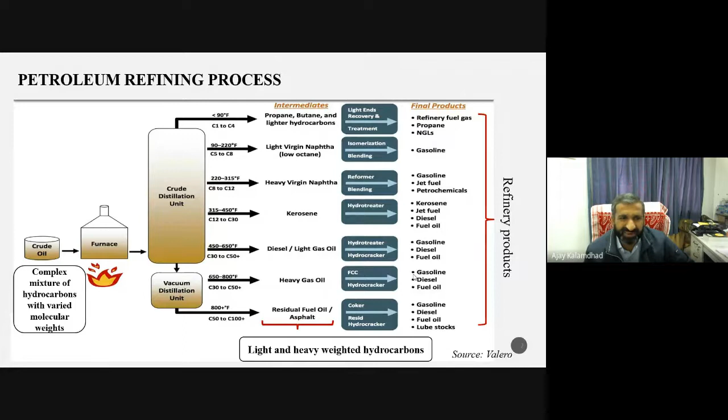Everyone knows about refining processes: hydrocarbons are processed into intermediate products, and these are the final refined products generated from refinery processes, like refinery fuel gas, diesel, and many other products. There are a number of refinery industries in India, especially along the Arabian Sea, and Assam is also known for these kinds of refineries.

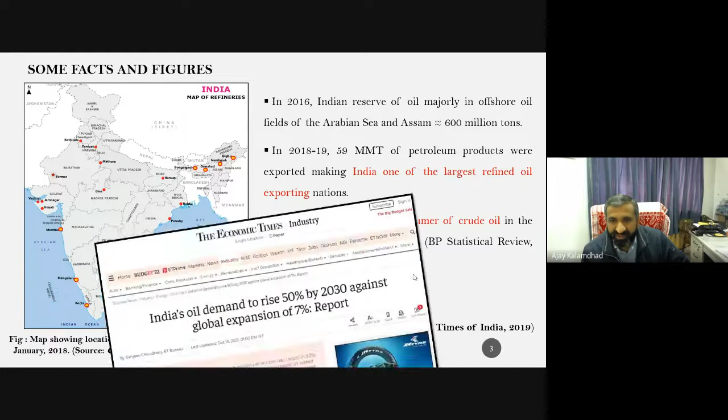Oil reserves are around 600 million tons as per the 2016 data, and 59 megatons of petroleum products were exported, making India one of the largest refined oil exporting countries. India is, after the USA and China, the largest consumer of crude oil in the world. This news also became very popular: India's oil demand will rise by 50% by 2030 against a global expansion of only 7%. I don't know whether we are all ready to manage this kind of demand.

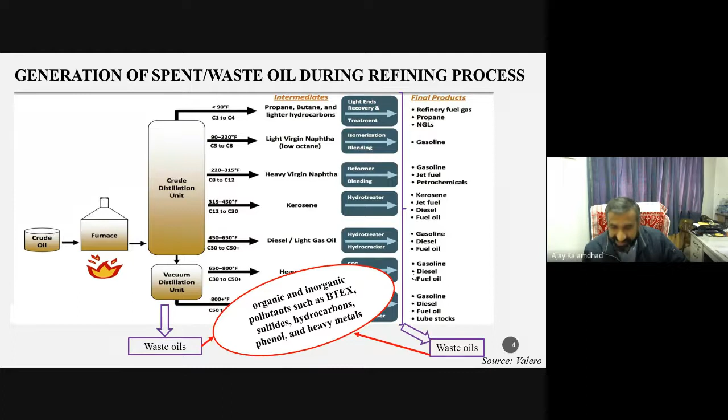Along with this, the processes generate a lot of wastewater, mostly what we call waste oil, whether from intermediate or final products. This waste oil mostly contains organic and inorganic pollutants, very polluting hydrocarbons, even phenol, and degradation is very difficult, especially of phenol, hydrocarbons, BTEX, and heavy metals. A good amount of heavy metals is also generated along with this waste oil. One such study is available in the US.

They were mostly talking about toxic air pollutants coming from the refineries. The problem is that refineries release toxic air pollutants, which can cause cancer and many other issues. Like, 22,000 tons of hazardous air pollutants are getting generated. That is one of the reports given by the US EPA.

And these are toxic, because these are carcinogenic, hazardous metals. A lot of health issues are coming out from the air pollution. I don't think in India we have studies available on how much air pollution is coming from these refineries. Not only the release to air, but the waste oil, which I was talking about in the previous slide, is very difficult to treat, and we cannot easily dispose of it without any treatment.

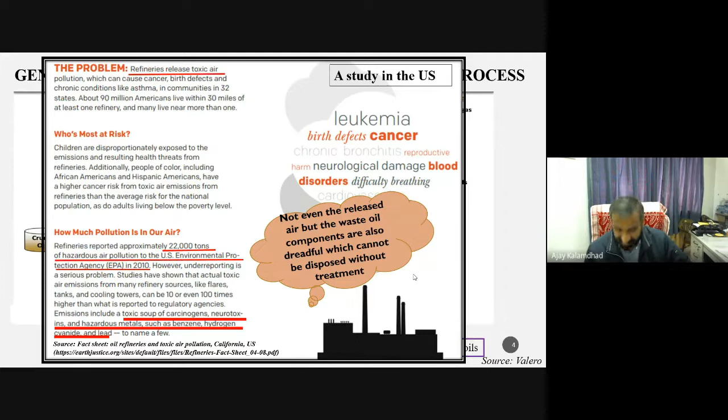But as per my information, all the refineries in India have treatment processes available. The effluent treatment processes, or whatever wastewater is generated, mostly waste oil, is treated by different methods. These are the major processes I showed, based on the different literature, by which it is getting treated.

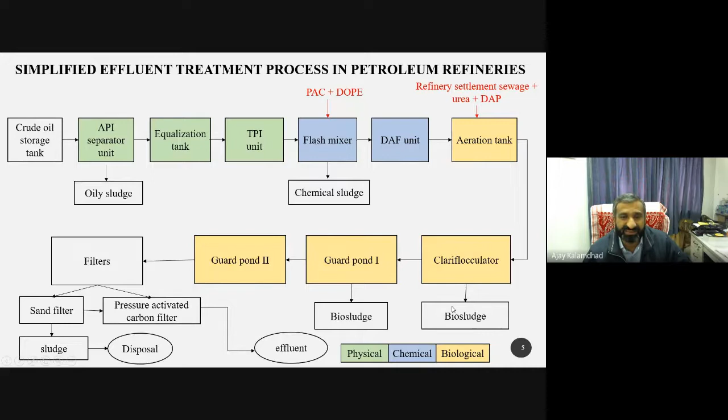And because of this wastewater treatment, a lot of sludges are generated: oil sludge, which is mostly physical in nature, and chemical sludge, especially from the flash mixer process. And the last point, the settling points, will generate a lot of biosludge, which is biological in nature. So all three different kinds of sludges are getting generated. I'll show you some photographs.

Here the oil sludge is generated from the physical treatment process. This is chemical sludge from the chemical treatment process, and finally biosludge from the biological or settling processes. And all these kinds of sludge are highly carcinogenic, highly hazardous in nature. And I don't know if in refineries some methods are available to treat that.

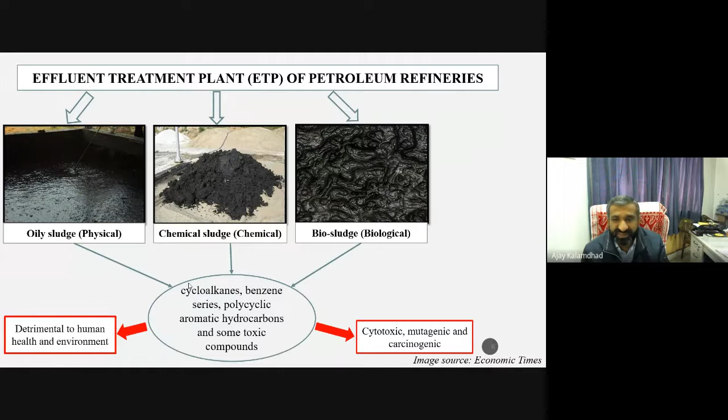Mostly in refineries you will find one pond where this kind of sludge is stored. But I never found any treatment process showing how they are treating it. This is very problematic and is creating a lot of issues, these sludges, and the generation itself is very high. I'll give some data. As I told, it is cytotoxic and carcinogenic in nature, not good for human health as well as for the environment.

Some facts you see here: 1 kg of crude oil will generate 10 to 20 grams of oil sludge, and more than 60 million tons of oil sludge is estimated to be produced every year. 60 million tons, and more than 1 billion tons of oil sludge has been accumulated worldwide. It's not only in India, but 1 billion tons of oil sludge has been generated.

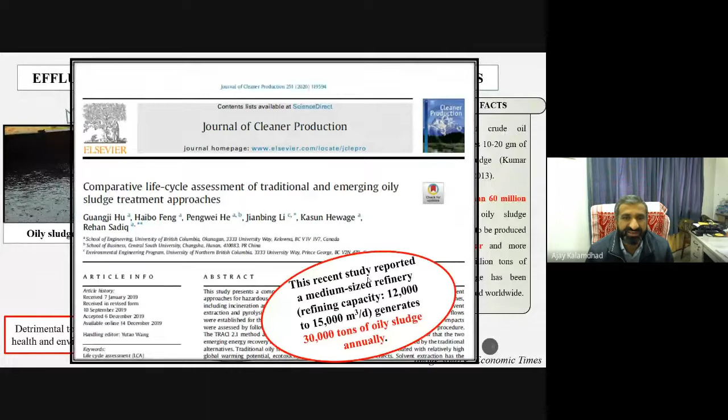So what kind of treatment and disposal of refinery sludge is normal? In India, I don't think we have treatment facilities available, but in European countries, they go for incineration. Incineration uses rotary kiln and fluidized bed; because it's light matter, it's good for incineration at a fluidized bed facility. Rotary kiln is also one of the very important technologies for the combustion of these kinds of sludges.

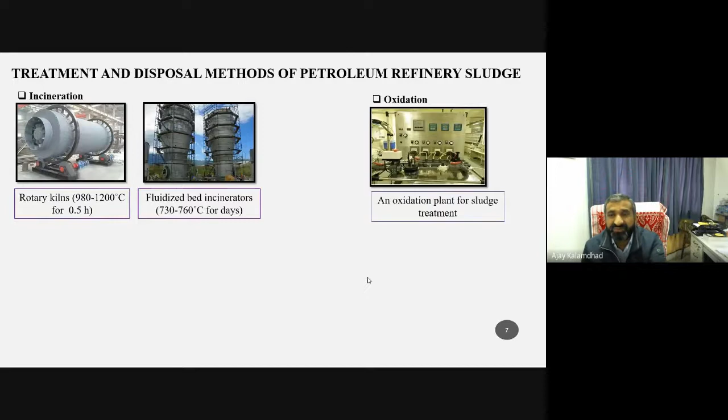Some countries have even started oxidation plants for sludge treatment, because a lot of organics are there, so oxidation of those is easily possible, especially for biosludge where the organic content is good.

And some countries like India are also doing sludge stabilization. A very simple method, or just land farming treatment. This also I think is very popular because it's a somewhat economical process.

But when you take the incineration facility, it becomes very expensive, and again after incineration, huge amounts of ashes are getting generated, that is solid residues. Even during combustion at 900 or 1000 degree temperature, it generates a lot of flue gases. That also we have to treat before putting to the atmosphere. So it's a very expensive method.

And in oxidation, we require a lot of chemicals in the oxidation process. But again, a lot of wastewater will get generated in the oxidation process. That also requires another treatment facility. And sludge stabilization and land farming obviously require a lot of land.

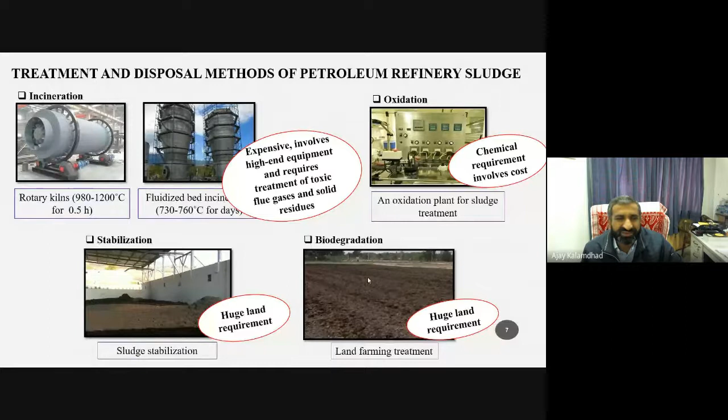In earlier days, refineries used to be outside of the city, but nowadays, I think you visit any refinery, it's very close to the city. Finding this kind of space or land every time is very difficult. Take the example of Guwahati refinery. Whatever space is available inside their campus, I don't think they can work with this kind of management for more than 2 or 3 years. So this is what one of the reports says.

So we already need an alternate source of energy. So not only are we required to manage the waste.

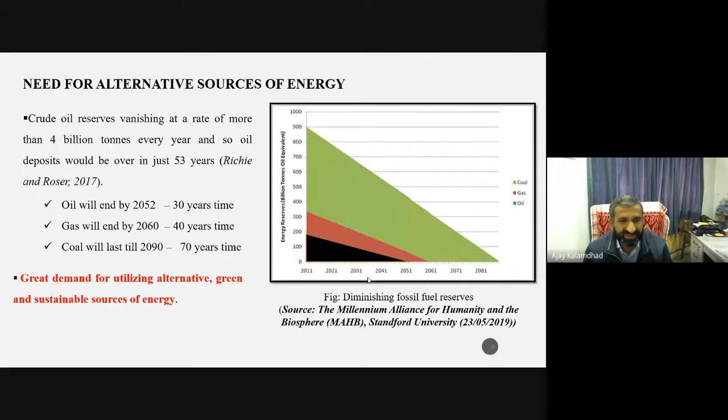So if you see the characterization of this refinery sludge, we call it PRS, it can be a potential resource for biogas generation. We found that the calorific value of different types of PRS, whether from a physical process, a chemical process, or a biosludge process, is very good. It could be 17,000 to 19,000 kilojoules per kg.

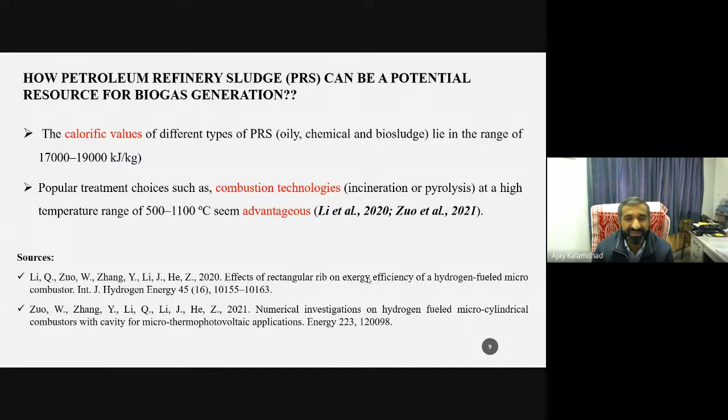And popular treatment choices, combustion technology, incineration, pyrolysis, are advantageous. There are some studies done in China. China is trying; you can see there are 2 research papers I found. They propose that because of the huge calorific value, combustion will be more beneficial or advantageous.

But the characteristics of PRS vary greatly in moisture content. The moisture content sometimes will be very low, like 6%, and many times it is found to be up to 80%. And if you go for combustion or incineration of such sludge, I don't think it becomes economical, because we require a lot of energy to first remove the moisture, and only then can the combustion go ahead.

So if you see, PRS could be a potential substrate, because it already has a good amount of organic matter, and also the moisture content is there. So why not propose this kind of material for biogas production? Okay.

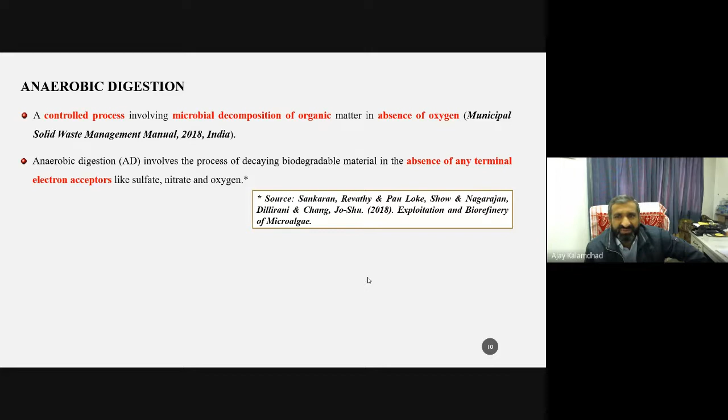So first, I'll talk on anaerobic digestion. What is anaerobic digestion? And then I'll show some of the literature and our work, how beneficial anaerobic digestion of these kinds of sludges could be. Normally, anaerobic digestion is a controlled process involving microbial decomposition of organic matter in the absence of oxygen. Or in a more technical way, anaerobic digestion is the absence of any terminal electron acceptor, mostly oxygen. Okay.

This anaerobic digestion process generates two major gases: methane and carbon dioxide. These are the primary components, along with some trace gases like hydrogen sulfide, nitrogen, and hydrogen, but the major concentration will be methane and carbon dioxide.

Whatever material is left after the anaerobic digestion process is called digestate, and it is normally very rich in nutrients. In India, the outlet of the anaerobic digester is often considered compost, but it's not proper compost. At many locations where these plants are installed, the digestate is separated into solid and liquid: the solid is considered or proposed as compost, while the liquid is recycled back into the anaerobic digestion process.

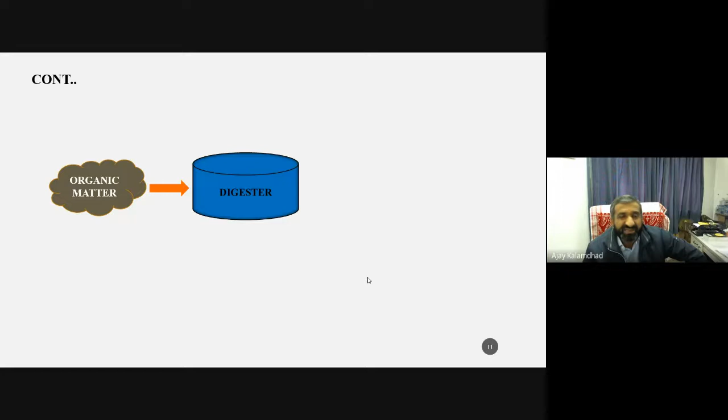To explain simply: organic matter, whether refinery sludge or any other kind, is fed into the anaerobic digester, and the outlet gets digestate while the digester generates biogas. This biogas can be directly heated for cooking purposes, or considered for biomethanation where biomethane is added into the gas grid. India doesn't have such facilities yet, but this is a popular method elsewhere. We can also use it as bio-CNG fuel, and nowadays everyone is talking about CNG-based vehicles.

This could be possible in Northeast India also. Just a few days before, our CM proposed that some vehicles will travel by CNG, and we can also generate electricity directly from this, power also can be generated out of that.

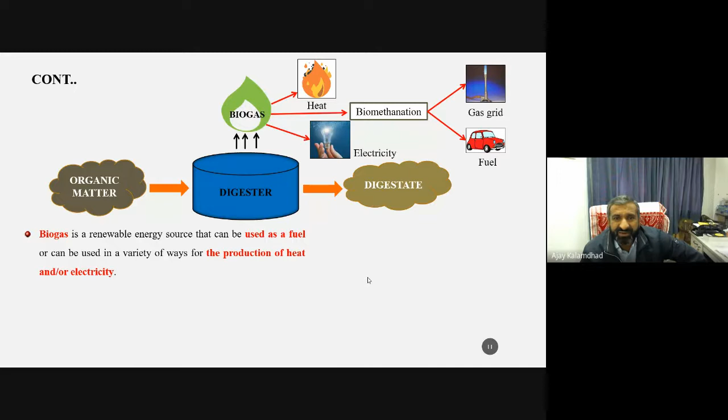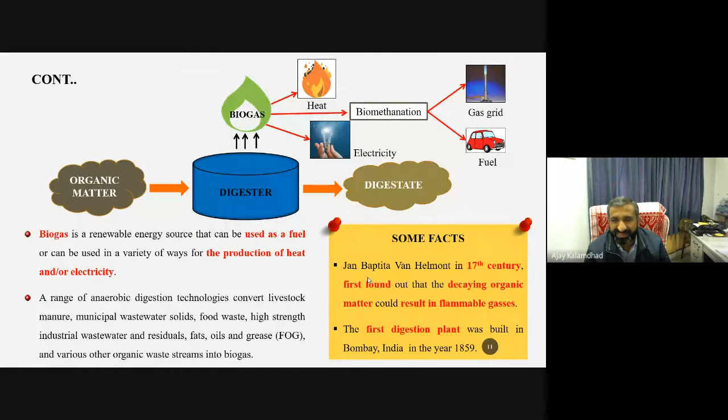To share with you, the first person was Jan Baptista Van Helmont, who found in the 17th century that decaying organic matter could result in flammable gases. But don't get surprised that the first digestion plant was built in Bombay, now Mumbai, India, in the year 1859. That is the first digestion plant.

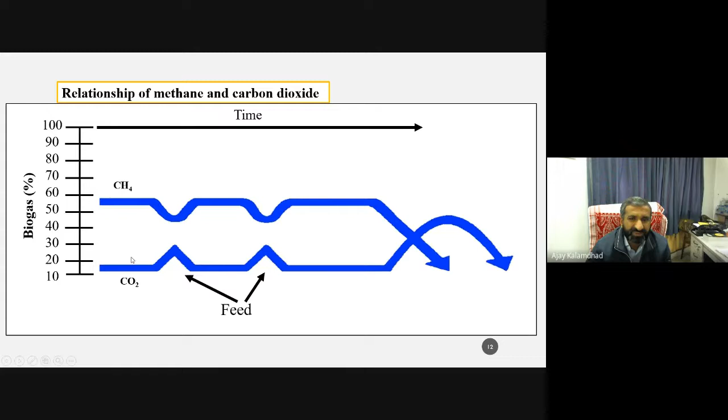So this is the reactor, and this graph shows biogas production over time. The methane will always be high compared to CO2, but over time, if the carbon dioxide production in the digester increases and the methane percentage gets reduced, there won't be any burning.

That means the gas is not able to be utilized for any method, whether for CNG process, gas grid system, heating purpose, or power production - it's not possible at all. So remember, if the biogas being generated has a carbon dioxide percentage more than 44%, it won't be a combustible gas. We can't even use it for cooking.

So what are the different stages in the anaerobic digestion process? It has 4 different stages: the first is the hydrolysis phase, then acidogenesis phase, acetogenesis phase, and finally methanogenesis phase. All microorganisms are involved at each stage.

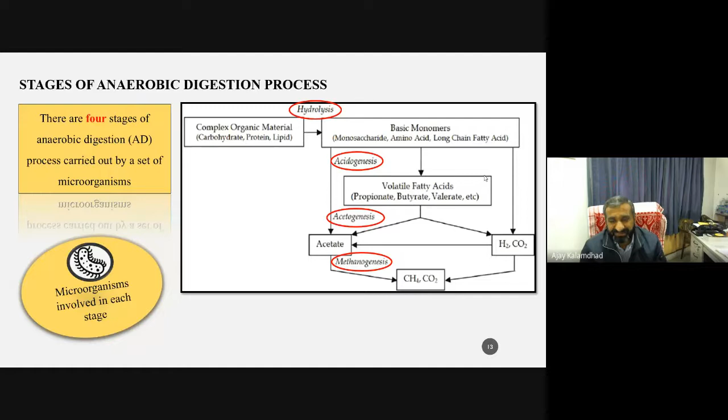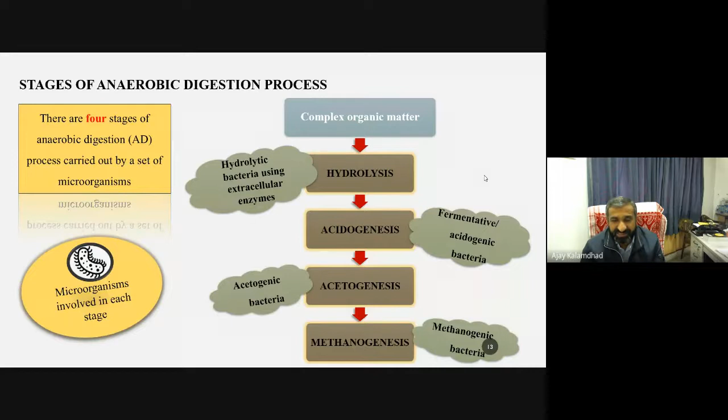This complex organic matter is first hydrolyzed by hydrolytic bacteria, followed by acidogenesis by fermentative or acidogenic bacteria, followed by final acetic acid production by acetogenic bacteria. This acetic acid is then broken down by methanogenic bacteria, and finally in this stage the methanogenesis process generates methane and carbon dioxide.

The role of microbes in the anaerobic digestion process is very important, mostly played by the methanogenesis process. But initially we require acetogenic bacteria, which will degrade the matter and convert it into acetic acid.

One by one stage: hydrolysis is where insoluble complex organic hydrocarbons are converted into soluble monomers. For example, cooking at home is like a hydrolysis process, where cellulose is converted into sugar form. Similarly, hydrolysis is required here.

Hydrolysis is a very slow process and very important - it is the rate-limiting stage among all four stages. We have to work more on the hydrolysis of the particular organic matter, and this involves microbiochemical reactions.

The second stage is acidogenesis, where hydrolyzed products are converted into simple molecules with low molecular weight, mostly generating propionic acid and butyric acid.

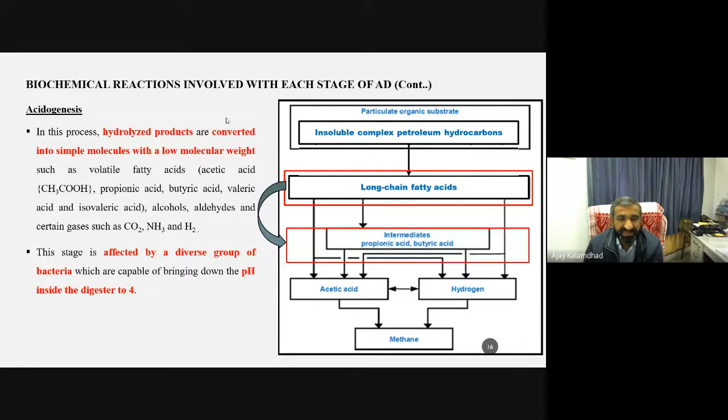These are called intermediates. It is affected by a diverse group of bacteria, which is capable of bringing down the pH inside the digester to 4. Only in acidic pH will it work.

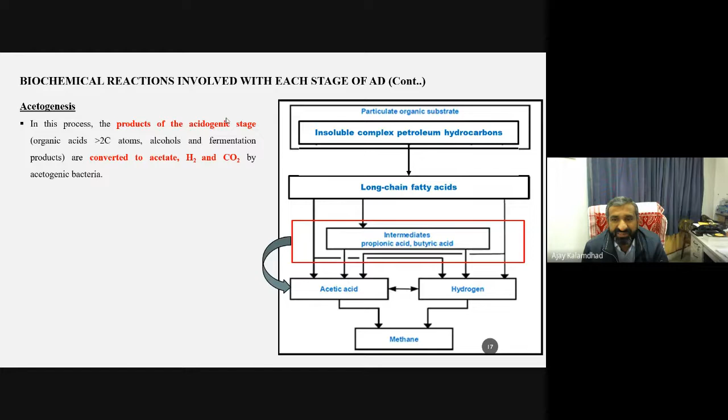The third stage is acetogenesis, where the products of the acidogenic stage are converted into acetate, H2 and CO2. These intermediates finally convert into acetic acid and hydrogen.

There are two different types of bacteria. Acetogenic bacteria work as H2-forming bacteria, and homoacetogens catalyze acetic acid to CO2 and H2.

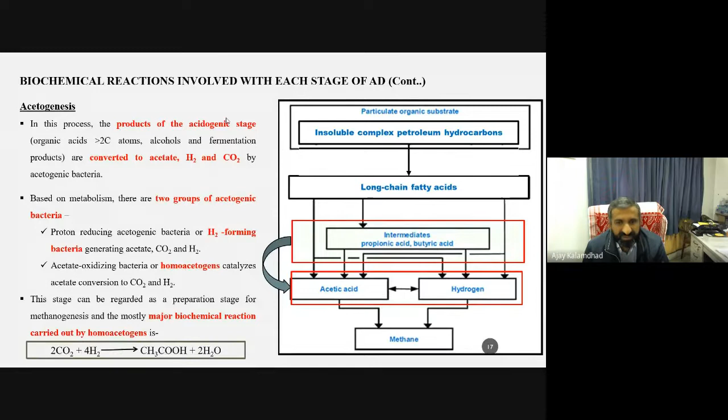Finally, from acetic acid, the last stage is methanogenesis, in which methanogens create methane from the final product of acetogenesis. There are two pathways: first, from acetic acid, CH3COOH converts into methane and carbon dioxide.

Also, a minor pathway is where carbon dioxide reacts with hydrogen. It's somewhat difficult to solubilize the carbon dioxide, but some amount is also generated by this method.

So what are the factors affecting the anaerobic digestion process? The first factor is temperature. This parameter plays a major role in the physical and chemical properties of the substrate and affects the thermodynamics and kinetics of reactions.

It's obvious that at mesophilic temperature, which is less than 45 degrees, most of our reactors or digesters operate at mesophilic temperature.

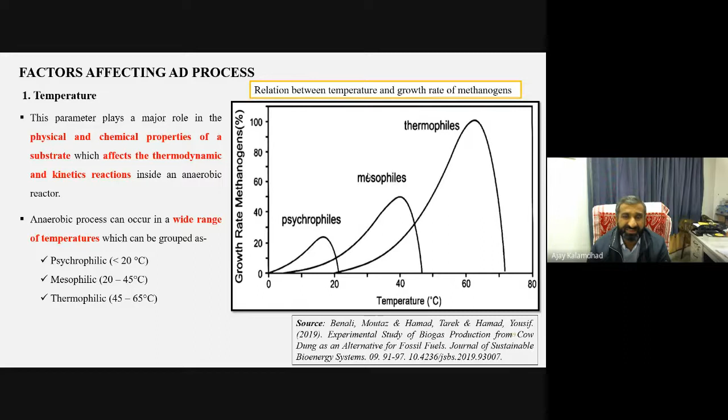At mesophilic temperature, the methanogenesis bacteria generation rate is very low compared to a thermophilic reactor. But the problem with a thermophilic reactor is that we have to provide a good amount of energy to achieve that kind of temperature, like 60 or 70 degrees in the digester.

The rate of reaction doubles for every 10-degree rise in temperature, up to an optimum, after which the reaction rate declines rapidly.

That's why in many places you see the digester placed underground, because it is highly affected by local or ambient temperature, especially in India, where in North India or other parts the ambient temperature can be close to zero, or 4 to 5 degrees. In that case, methane generation will obviously be affected.

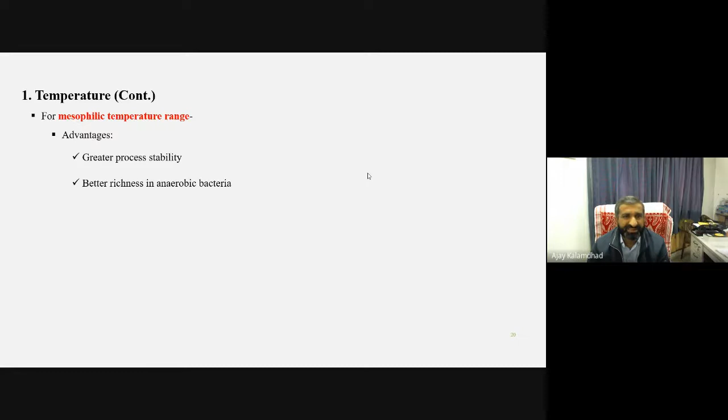But if you operate at mesophilic temperature, you'll get more stability and better richness in the anaerobic bacteria, only the yield will be lesser compared to thermophilic temperature. So too high a temperature is also not good, but mesophilic temperature is well accepted for biogas production.

Another parameter is pH. This parameter affects the overall efficiency of the digestion process, because in the acidogenesis process the pH will reduce, and only then will acetic acid get generated. But methanogenesis is only possible when the pH in the reactor is neutral.

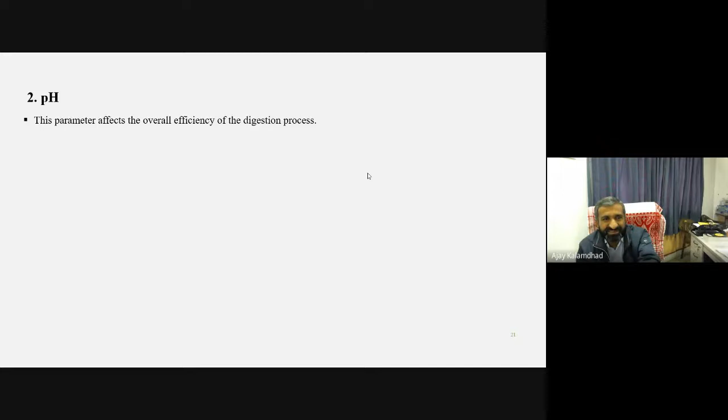Only at neutral pH will the methanogens be able to generate methane gas. That's why pH is a very important parameter. Normally, methanogens are effective at a neutral pH of 6.5 to 7.5.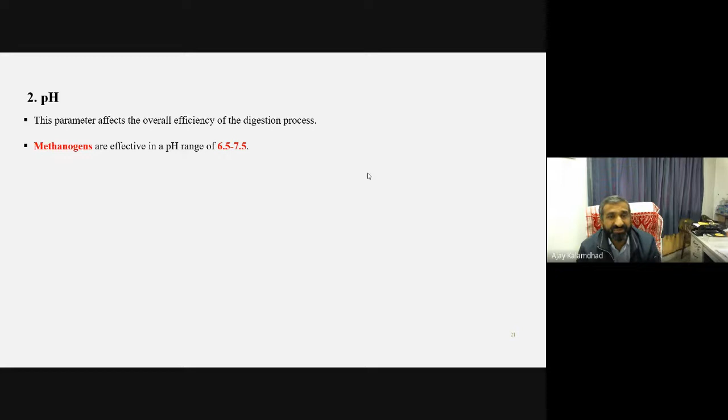To maintain a constant pH in the reactor, it is essential to control the relationship between volatile fatty acids and bicarbonate concentration. The volatile fatty acids reduce the pH, while the bicarbonate increases the pH, so this bicarbonate becomes a buffer in the digester.

As acidogenic bacteria flourish, lowering the pH below 5 will inhibit the growth of methanogens. Once the reactor pH is less than 5, it will inhibit methanogenic bacteria growth. And if pH is more than 8, it proves toxic to most anaerobes, inhibiting their biological function. pH becomes a very important factor for gas production.

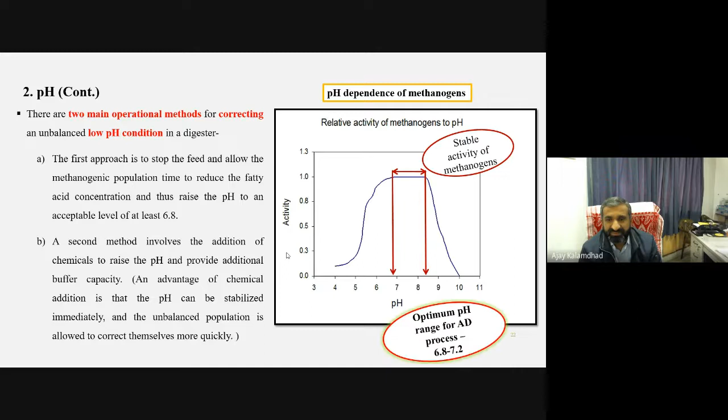This graph shows that maximum methanogenic or acidogenic bacterial activity occurs at neutral pH. This graph specifically shows methanogenic bacteria versus pH, with the optimum pH ranging from 6.8 to 7.2, up to 7.5.

Along with pH, we also need to discuss buffering capacity. In biological matter, a good amount of nitrogen is available, and because of the degradation of protein, ammonia is generated, which reacts with carbon dioxide to generate ammonium carbonate.

So this ammonia reacts with carbon dioxide and generates ammonium carbonate. This is one form of alkalinity in the reactor; degradation of salts also generates alkalinity, and sulfate reduction also generates alkalinity.

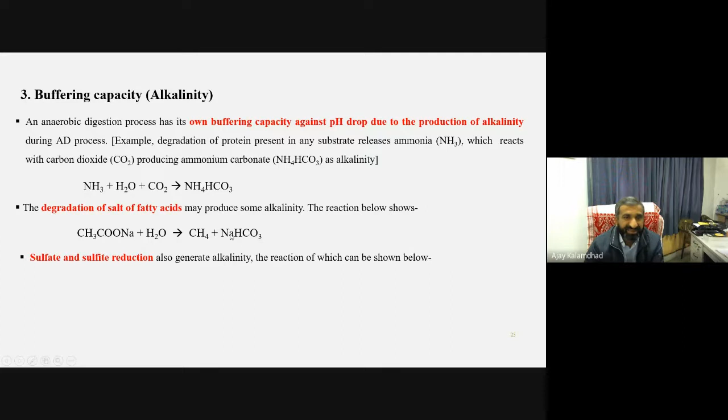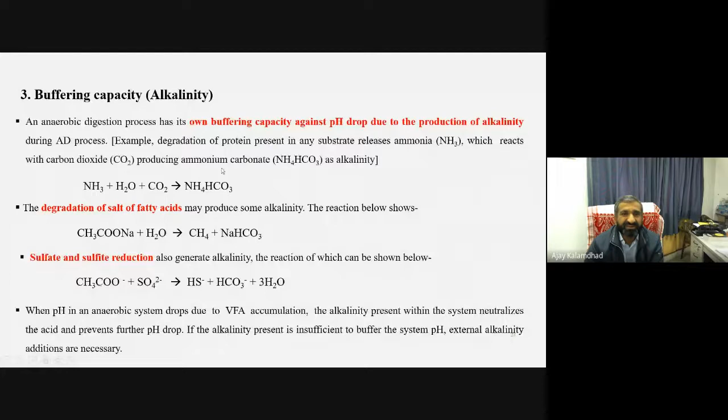Because of this, when pH in the anaerobic system drops due to VFA accumulation, the alkalinity present within the system neutralizes the acid and prevents further pH drop. That's why it is very important to see how much nitrogen content is present in the organic matter.

Another parameter is the carbon to nitrogen ratio. This is very important. If the nitrogen concentration is low, it will require longer duration for the degradation process, because the microbial consortia will be lower and won't be able to flourish. If nitrogen content is high, it will generate more ammonia. Ammonia is good for buffering capacity to maintain pH, but too much ammonia will inhibit the entire process.

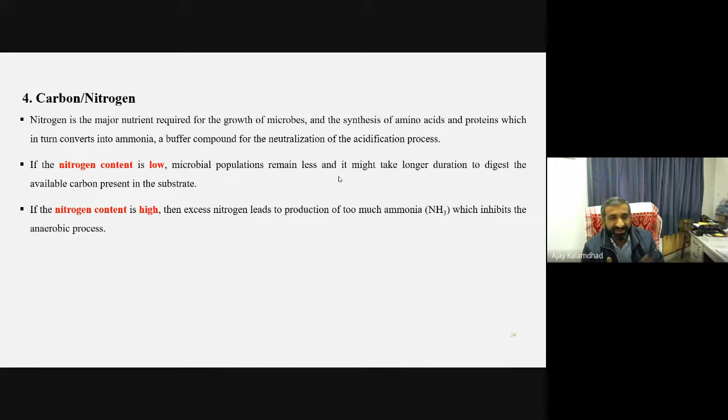Similarly, when feeding food waste into a digester, it often fails because if you don't treat it properly or combine it with the proper concentration of carbon, it's very difficult to run with food waste. Carbon serves as a source of energy and nitrogen controls the microbial population, so the carbon to nitrogen ratio plays an important role. A C:N ratio range of 20 to 35 has been found to be mostly suitable for various types of organic matter.

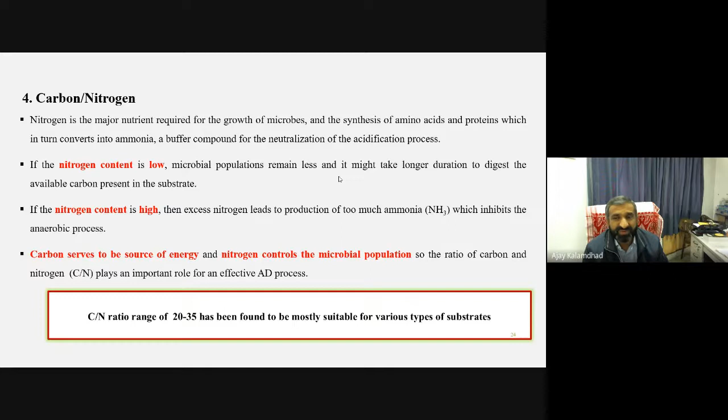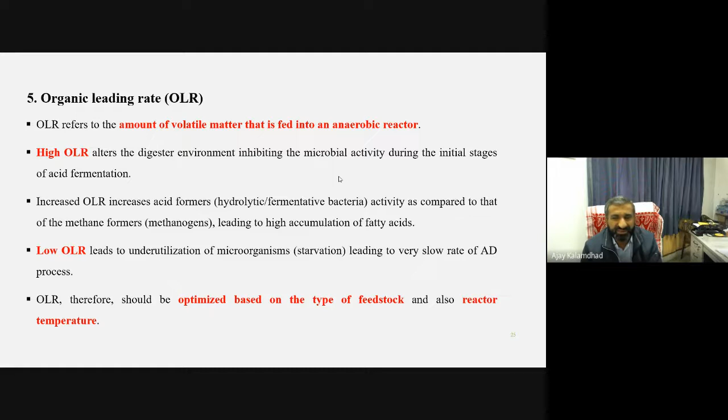Another parameter is OLR, organic loading rate. This is also very important. High OLR will alter the digester environment, inhibiting microbial activity during the initial stage, while low OLR leads to underutilization of microorganisms, causing a very slow rate of anaerobic digestion. So optimized OLR has to be finalized when we start feeding the reactor, and based on that we can propose the best OLR for any substrate or organic matter.

Another parameter is HRT, the average time that the organic substrate remains in the digester. Lower HRT is more beneficial, but it is desired to be long enough to provide sufficient methanogenic activity. HRT is shorter for AD at high temperature, but it also depends on the type of sludge or waste. Based on HRT, we finalize the digester size, how much quantity, and what kind of size will be required.

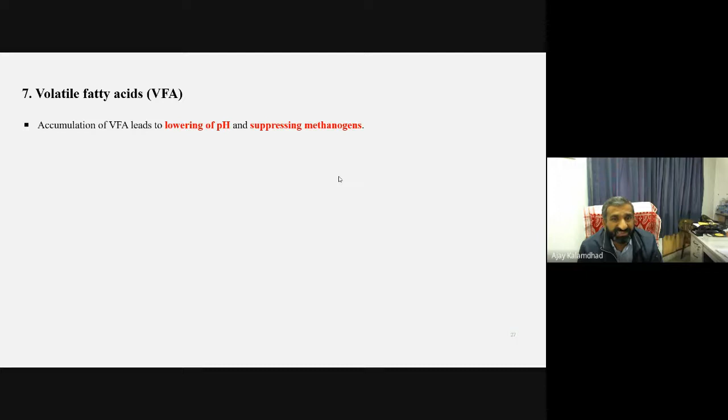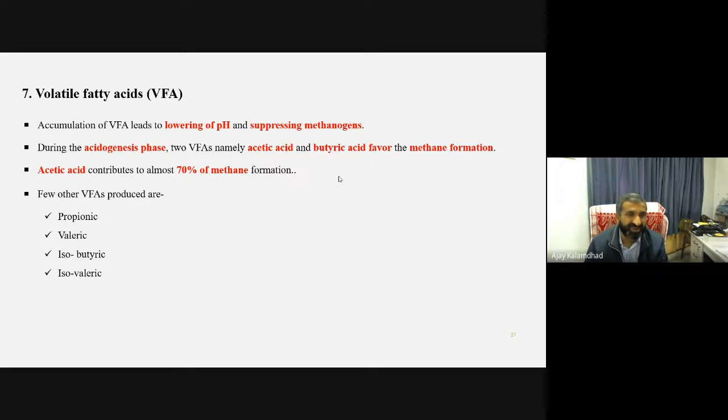Another parameter is volatile fatty acids. We look to generate more VFAs, especially acetic acid, which generates methane and carbon dioxide. But accumulation of VFA leads to lowering of pH and suppressing methanogens. In acidogenesis, acetic acid contributes almost 70% of methane formation, while remaining VFAs like propionic, valeric, or butyric acid contribute the remaining 30%. That's why VFA concentration is a good indicator for monitoring performance of the anaerobic digestion process.

There is another thought: biogas enhancement from any organic substrate through a pre-treatment process. We already saw that hydrolysis is the rate limiting stage, so why not propose the pre-treatment process at the hydrolysis stage itself?

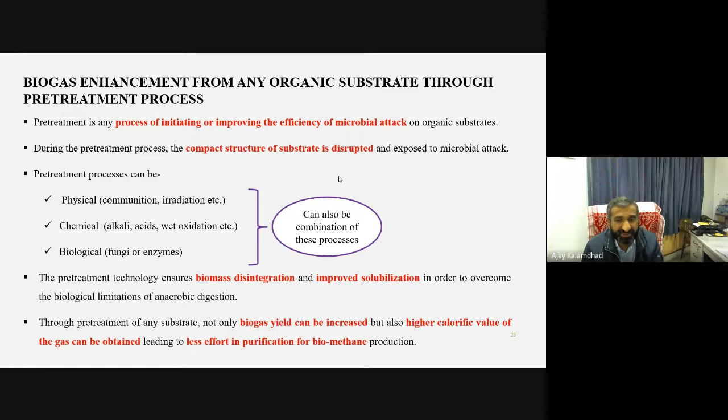Pre-treatment is any process of initiating or improving the efficiency of microbial attack. In the pre-treatment process, the compact structure of the substrate is disrupted and exposed to microbial attack. This can be done by physical, chemical, or biological processes, or different combinations. Through pre-treatment, not only can biogas yield be increased, but also higher calorific value of gas can be obtained, leading to less effort in purification for biomethane or bio-CNG production.

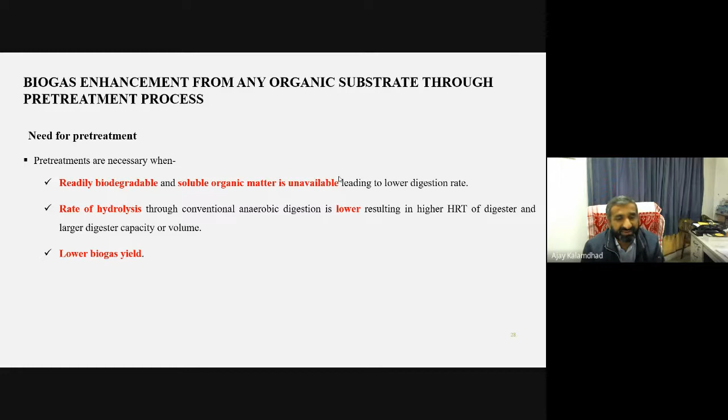What is the need for pre-treatment in biogas enhancement? When readily biodegradable and soluble organic matter is unavailable, we can propose pre-treatment. When the rate of hydrolysis through conventional anaerobic digestion is lower, we can follow pre-treatment. If there is lower biogas yield, we can also go for pre-treatment.

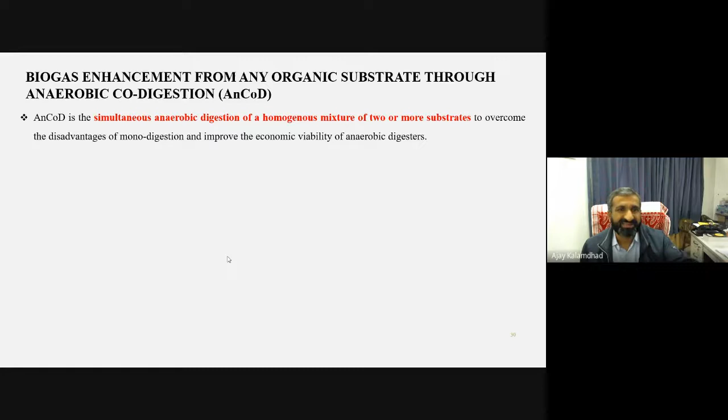There's another way we can do biogas enhancement, by the co-digestion process, anaerobic co-digestion. Normally we do anaerobic digestion for only one material or one particular substrate. But if you simultaneously mix 2 or 3 different substrates, that is more beneficial and it is possible to enhance the biogas production.

The use of a co-substrate improves biogas production and methane yield for many different reasons. The major one is that it maintains the carbon to nitrogen ratio properly. Substrates having a high C/N ratio have poor process stability in monodigestion, so addition of a nitrogen-rich co-substrate at an optimum ratio enhances biogas production.

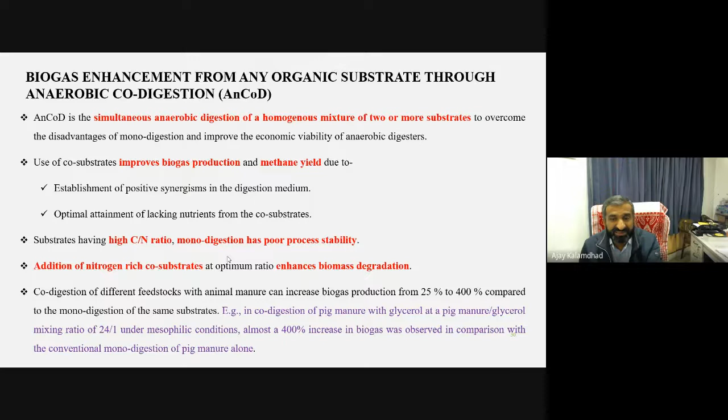Just for one example, co-digestion of different feedstocks with animal manure can increase biogas production from 25% to 400% compared to monodigestion of the same substrate. For co-digestion of pig manure with glycerol, if you mix these two, pig manure to glycerol mixing ratio is 24 to 1, it can increase the biogas production by 400%.

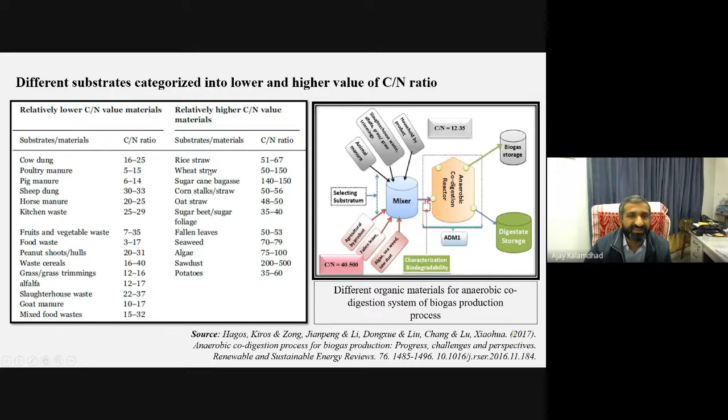In this table you'll see relatively lower C/N ratio materials like cow dung. These are relatively high C/N ratio, like rice straw, wheat straw. These are basically organic residues, agricultural residues. If you mix food waste with rice straw, food waste with wheat straw, or food waste with any other high carbon substrate, the biogas production will be good.

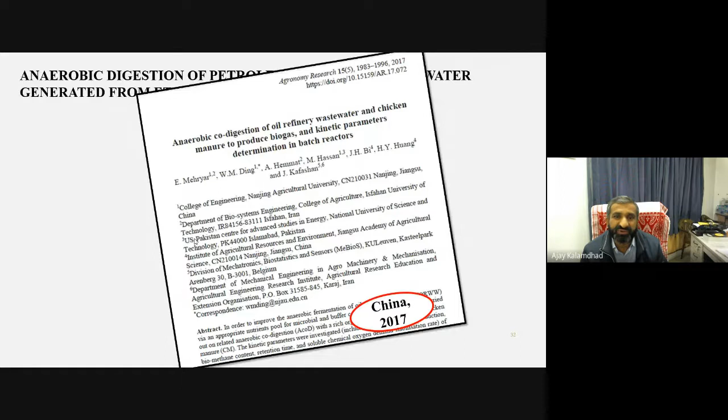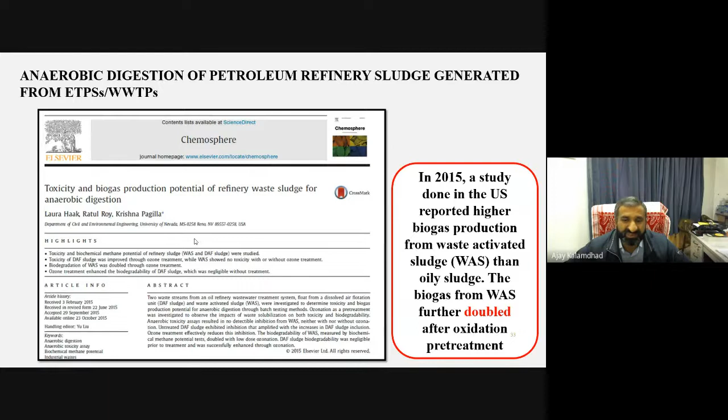In 2015, a study done in the US reported higher biogas production from waste activated sludge than oily sludge, and the biogas from this waste activated sludge further doubled after oxidation pretreatment. This is one literature. Another literature in Scientific Reports, from China, is on biogas production from waste activated sludge. They also tried pre-treatment with 170 degrees centigrade heat.

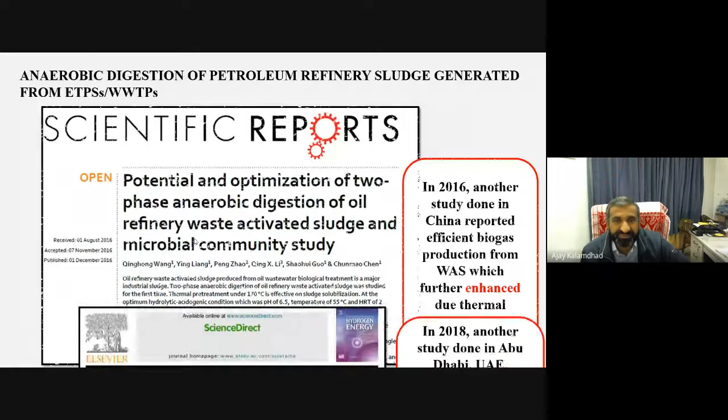Another literature, in 2018 in Abu Dhabi, found maximum biogas generation when 60% petroleum hydrocarbon waste was co-digested with 40% wastewater treatment sludge at mesophilic condition. The same thing I also shared, that co-digestion is more beneficial.

Now these are some successful works done by my own group, the Waste Management Research Group, WMRG, on anaerobic digestion of petroleum refinery sludge generated from the ETP, or wastewater treatment facility, of Guwahati refinery. We collected this sludge from Guwahati refinery. These are my PhD students. It's very difficult to collect the sludge. Getting permission was also very difficult. Even now they are not ready to give us the sludge.

When we initially characterized it, you see the initial characterization of refinery sludge. The volatile solid is very good, 75%. Moisture is also very high. Because of that, we thought we can go for biogas production.

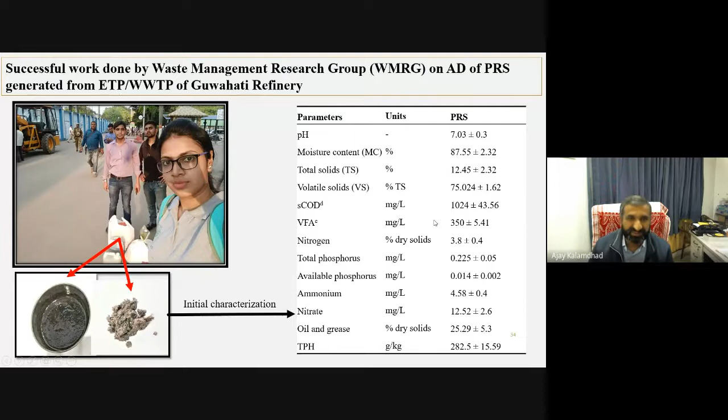Then we started this 1 liter BMP setup to know how much methane could be possible. That is a 1 liter biochemical methane potential setup, which we call BMP. The entire process required 70 days. Some data I'll show you. Here we maintained different I/S ratios, the inoculum to sludge ratio. The inoculum we used was cow dung.

One inoculum was cow dung because the nitrogen content was very low in the initial material, and the microbial consortia also was not available in the refinery sludge. So we thought we'd add some amount of inoculum, whether the inoculum could be fresh cow dung, or we can take digestate from a running biogas treatment facility or anaerobic digester; that digestate also we can use as an inoculum.

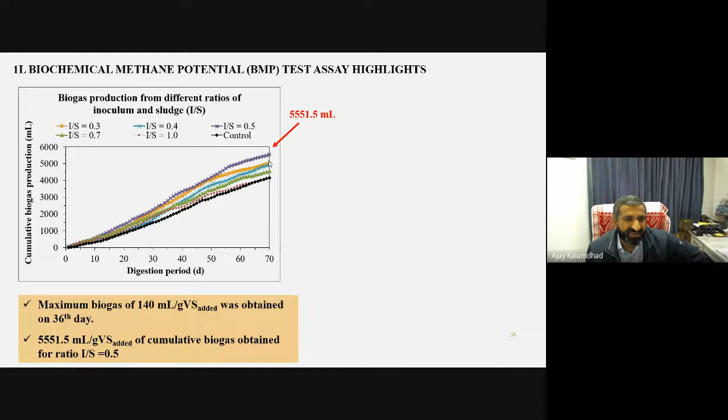So different inocula, and successfully at 70 days. The HRT is very high, 70 days, we have to put it in the reactor. So a good amount of gas was produced, 5,551 ml gas we generated. The maximum biogas of 140 milliliter gas production was obtained on day 36. And cumulative was more than 5,000.

So here you will see that at 0.5 I/S ratio, the maximum VS reduction was found. Okay, but degradation was poor, only 10.8%. But still we were able to generate a good amount of gas. This is the COD, soluble chemical oxygen demand. Also you see by 30 days, volatile fatty acid generation was very good. So overall digestibility was quite poor with a lengthy hydrolysis phase, which demanded pre-treatment.

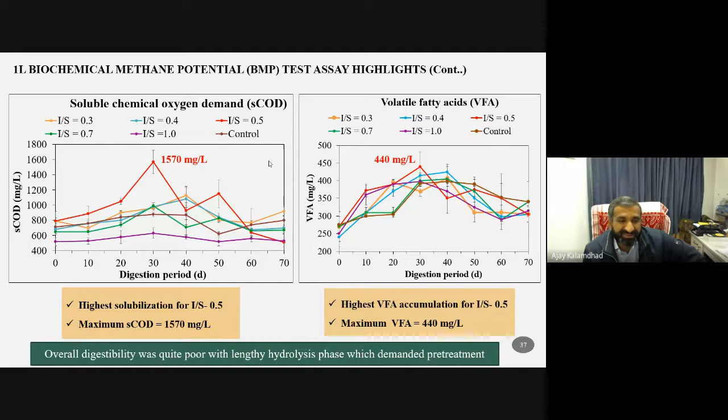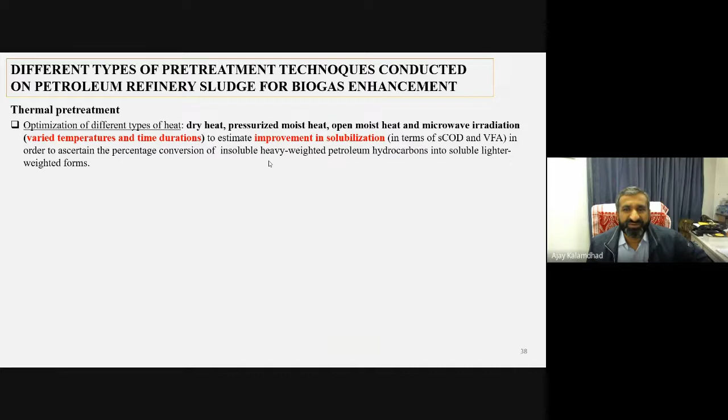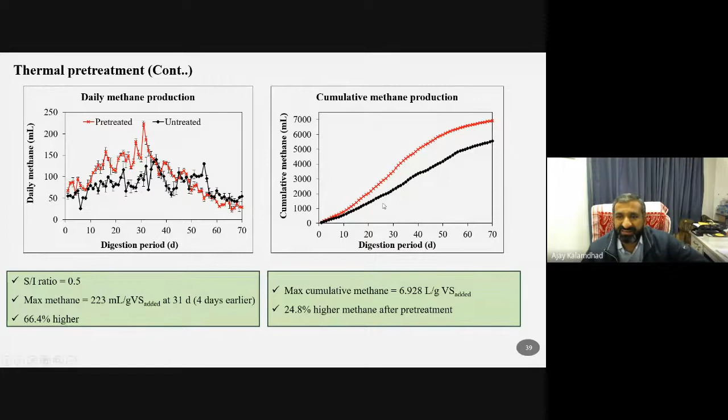Then here you can see the pre-treatment easily. You can see the untreated one, the daily methane generation, and this is the pre-treated one, red color, for S/I ratio 0.5. This is the cumulative methane production. So initially the hydrolysis phase was longer without pretreatment, but you see here, after 10 days, the gas production has increased because of the pretreatment process.

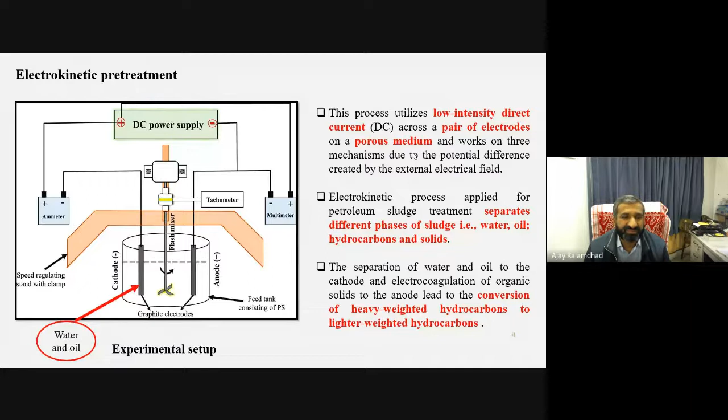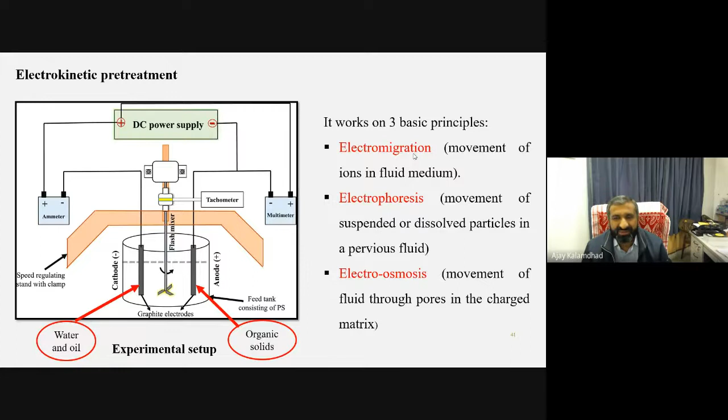Then we thought of another pretreatment process, electrokinetic pretreatment, where we put an anode and cathode and provide some power or electricity, and because of that degradation could be possible. That is specially targeting hydrocarbon breaking. There are three principles we are working with: electromigration, electrophoresis, and electroosmosis in the degradation process. So this is the refinery sludge, and this is the setup of the electrokinetic pretreatment condition.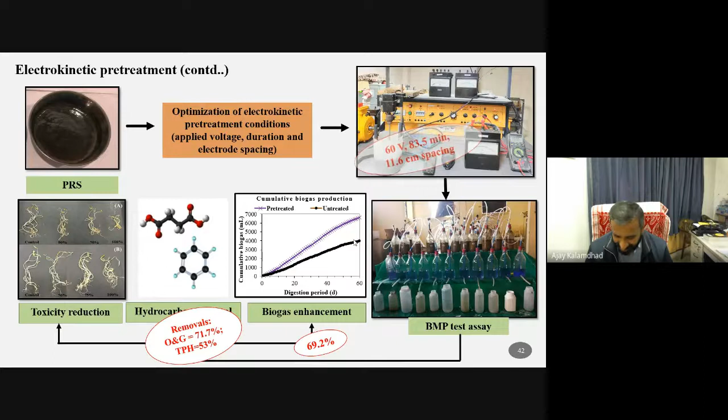Then we targeted microbial pretreatment, because what we found in all the different processes, it still required 60 days for degradation because of non-availability of enough bacterial consortia. Then we thought of Pseudomonas putida, which we purchased from MTCC Chandigarh. Then we harvested that bacterial solution, and with different serial dilutions, we calculated and evaluated the optimum dose and pre-treatment duration.

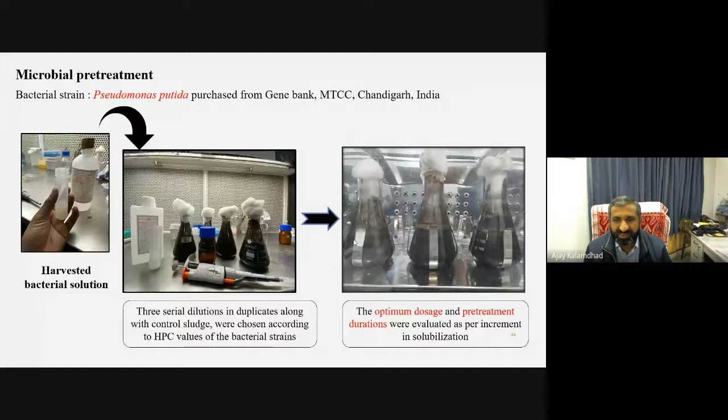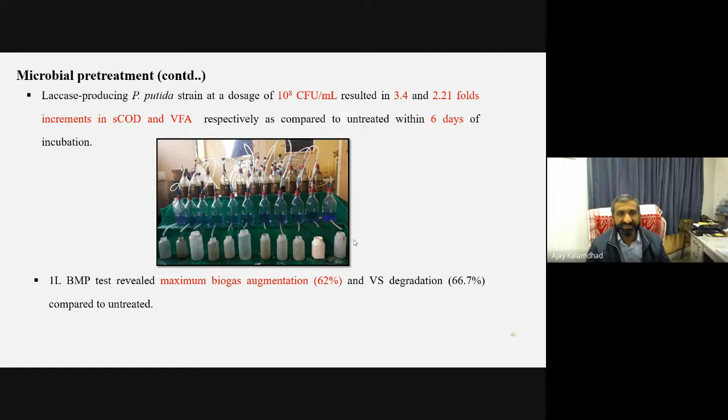This scaled-up study of 20 liters resulted in 57% total phenol degradation, organic matter degradation also, and 91% of phenol removal was possible within 50 days of digestion. Now, this is another research paper you'll see here: enhanced methane production and hydrocarbon removal from petroleum refinery sludge after Pseudomonas putida pretreatment and process scale-up.

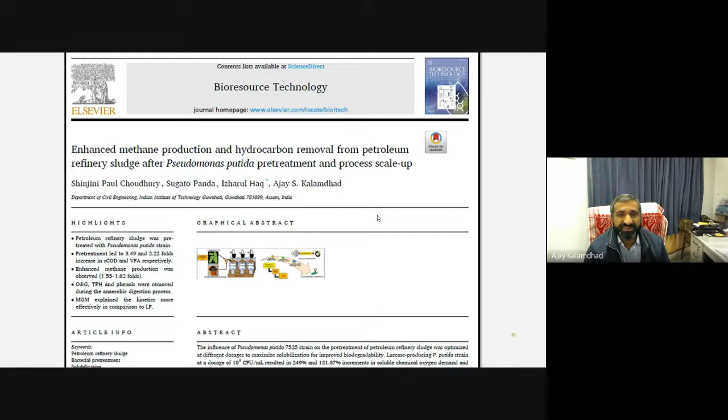Some ongoing work from the group: now we are targeting co-digestion studies to find the suitable co-substrate for biogas enhancement. Also, we are targeting different types of pretreatment to further enhance the biogas production from co-digestion, and we are scaling up this batch study to the continuous level in an anaerobic biphase baffled reactor. So this is the 20 liter reactor. Currently we're running it at a continuous level. Continuous means fed batch system.

Every day we are feeding the reactor, because we're looking to run around a 1 meter cube or 10 meter cube reactor. But the only problem is we're not able to get the sludge, because we get permission for only 4 kg or 7 kg in every visit. I'll request those of you working in refineries, please allow us to collect the sludge, because I had a good long discussion with the Guwahati refinery people working on wastewater. I asked them if I can install one reactor in their refinery itself, but they shared that they can't accept outside technology.

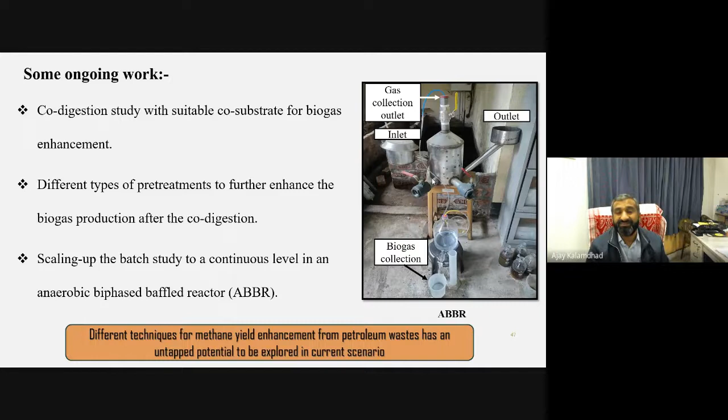Refinery people have their own research institute located somewhere in Uttar Pradesh, and whatever technology they come up with in the final design, they take up from that particular research institute. But we were really looking to get a good amount of sludge, so that we can work on at least an industrial level biogas reactor.

So just to share what other successful trials we did in our solid waste lab by the WMRG people: we treated food waste, even water hyacinth. I think all of you will be surprised that water hyacinth, pani meteka, becomes a very good substrate for biogas production. Very difficult to degrade. Hydrilla is another weed. Even pulp and paper mill waste from the Nagaon paper mill, which has been closed now. When they were running, we used to collect a good amount of pulp and paper mill waste from that industry. Even crop residue, rice also.

Even the terrestrial weed is very difficult. Parthenium hysterophorus is very popularly named Congress grass. It's very hazardous in nature, but that also we treated very well in our WMRG group, with different inoculum also. Even piggery waste is very important to manage here. That piggery waste we also co-digested with different waste materials.

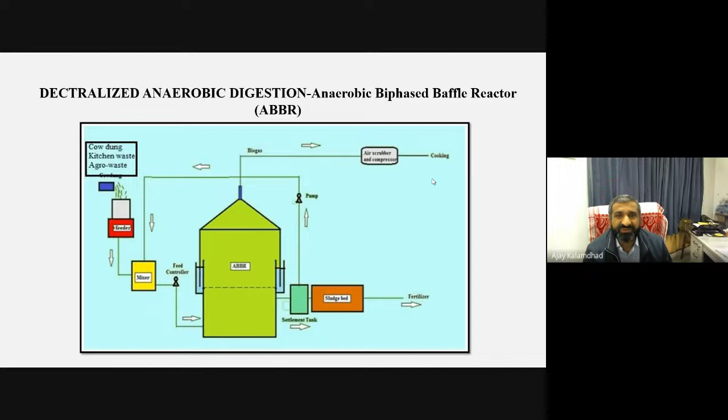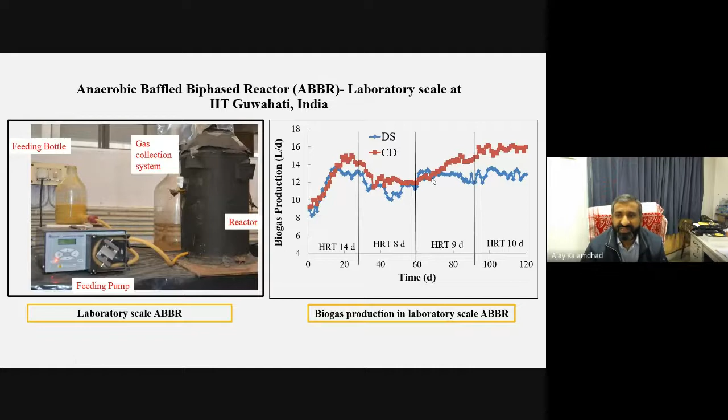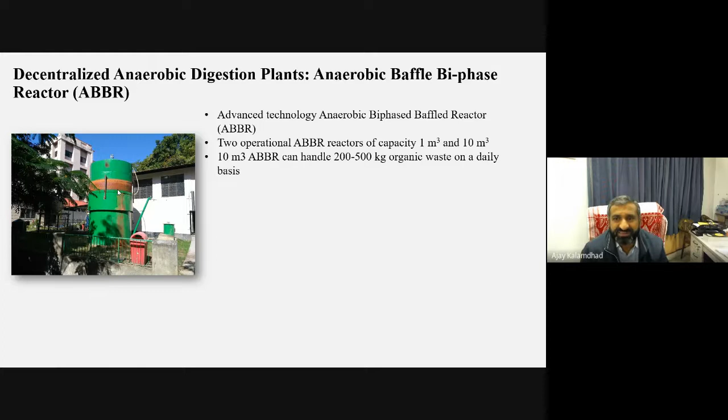Okay, so we have two in operation, 1 meter cube and 10 meter cube. This is the gas production, gas storage. The biogas is stored either for cooking gas or power production, which we also do in the laboratory. If people visit, currently our entire solid waste laboratory is running on the biogas facility. We are generating around 10 kilowatt energy per day, power production.

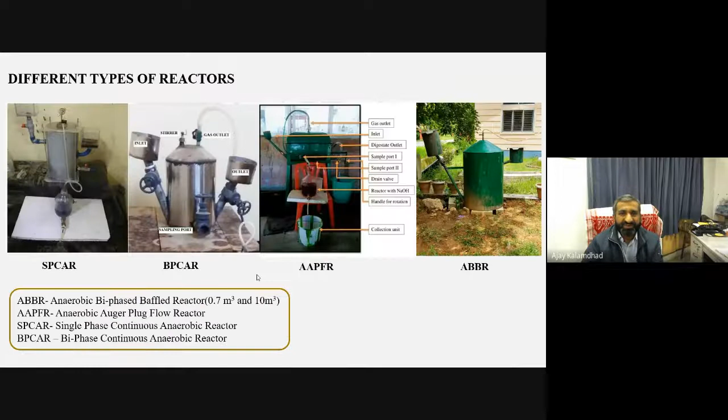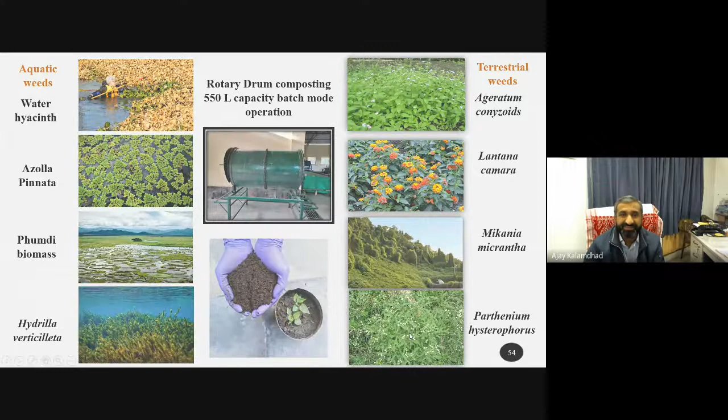So there are different types of digesters we designed; this ABBR was the last one, like AAPFR, BPCAR, SPCAR, different reactors. Along with the biogas process, we also generate a very good amount of compost. We use different waste materials like aquatic weeds such as water hyacinth, Phumdi biomass in Manipur, Hydrilla verticillata, different weeds, Ageratum, Mikania, Parthenium. All these we successfully treated, as well as sewage sludge and paper mill sludge.

So this is our pilot scale rotary drum facility, a 5 meter cube facility we're currently running, where we can feed around 400 kg of vegetable waste or any kind of organic matter. With only 7 days of composting process, we're getting 2.5% nitrogen.